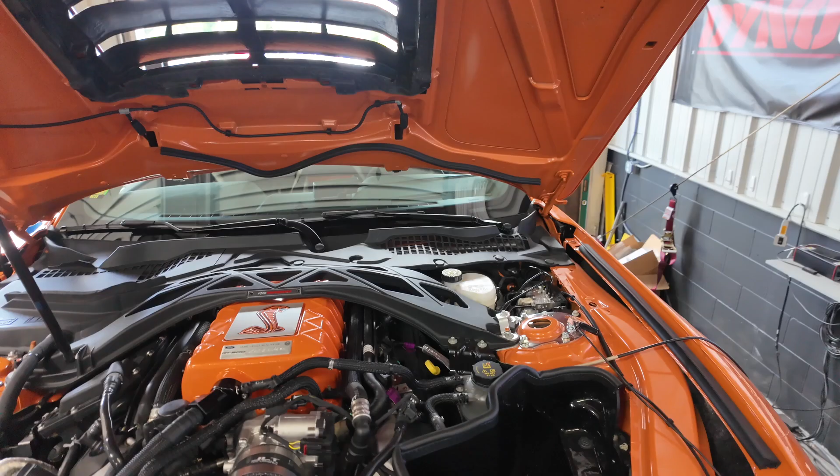We got another GT500 up on the dyno today, 2020. And this one is bright orange lid. So we'll kind of go over what we got going on under here. JLT cold air, VMP Predator lid with a Predator intercooler. It's got a 285 pulley on it, and it's got Kooks 2-inch headers with a Borla catback with the SwitchFire

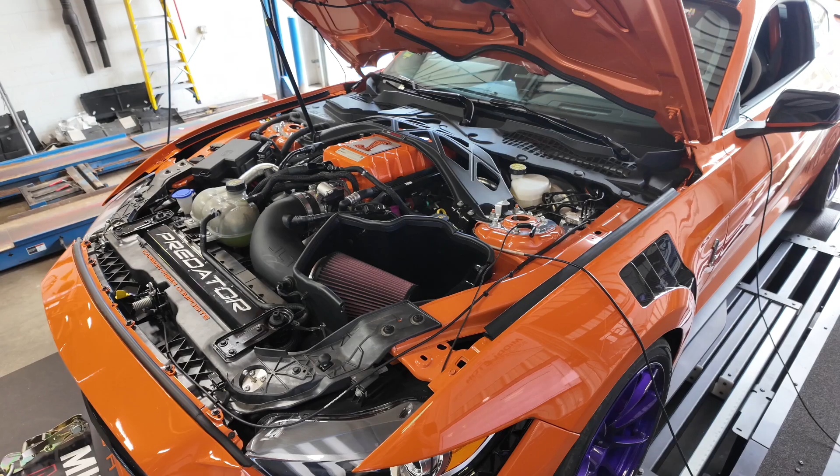crossover. So we got some pretty loud exhaust noises this thing makes. I think it sounds pretty awesome. I got pretty much the same setup on my car. I got a different brand header, but he's got a lot of dress-up stuff going on under here. He's got some other stuff going on, but yeah, pretty basic package.

This pretty much follows our 800 package. This owner did the work himself, but very similar to what we would call our MM800, with just those simple bolt-ons. So pump gas, 93 octane is what we're running on this. We're not doing any E85 or any fuel injector change or anything like that. Stock throttle body. The supercharger is not ported, so just the stock supercharger. So basically just external bolt-on stuff.

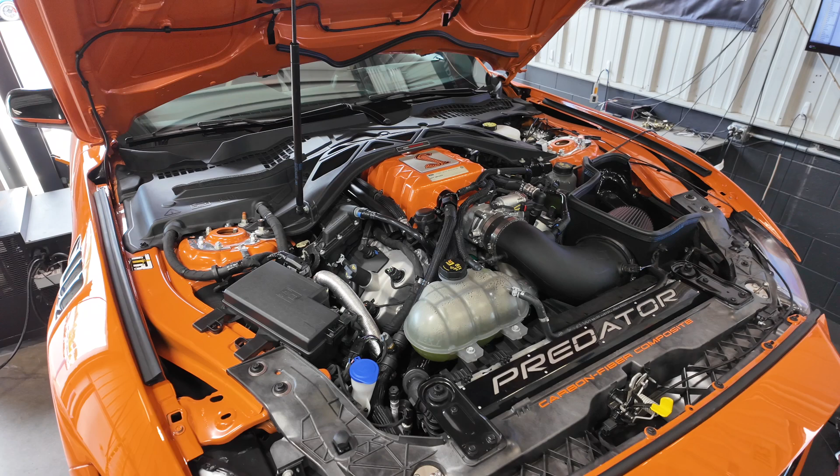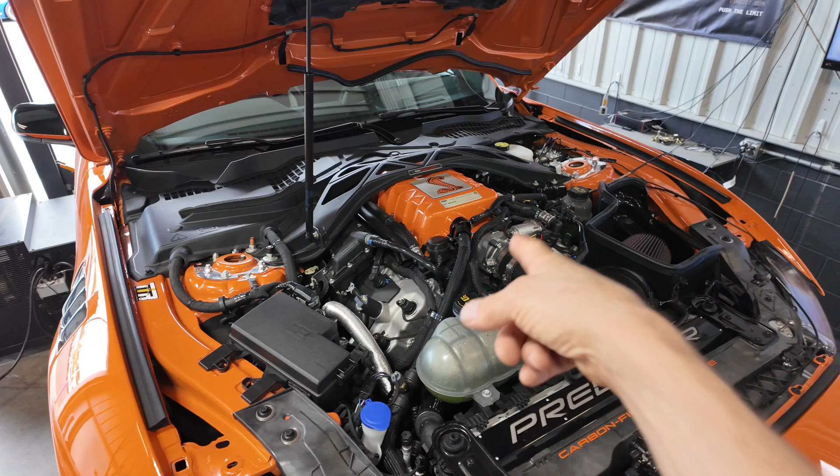And he does road race this car, so that's why we did suggest he go with the VMP cooler and the taller lid for the taller cooler, which definitely makes a big difference on road course. We don't see a whole lot of gains on the dyno out of these mods, and I've talked about that before in previous videos. But when you get on the road course, that lid and cooler runs 40 degrees cooler than the stock lid, especially once you start pulleying stuff.

Even with the stock pulley, we were seeing 170, even 175 degree intake temps. The manifold, the supercharger temp, which is read on the back of the lid. With this lid and cooler, 130, 135 on a hot day. So we definitely see a big drop. And again, a car like this with a pulley on it, you're going to see even more of a gain from where you would be to where you are with this lid and cooler.

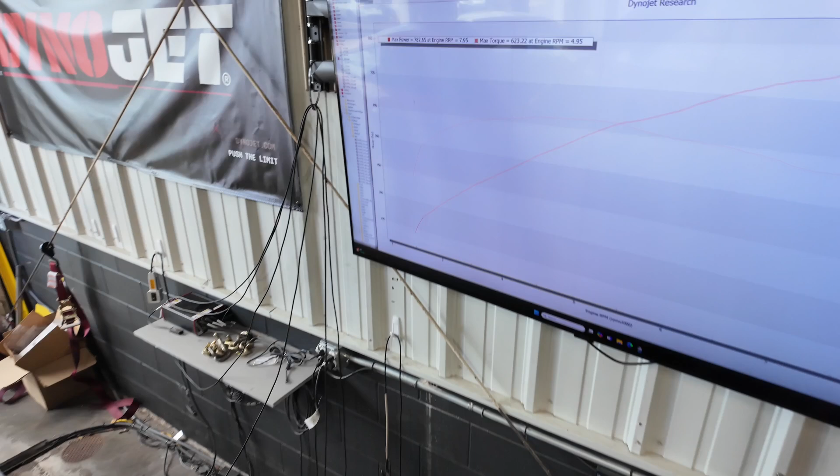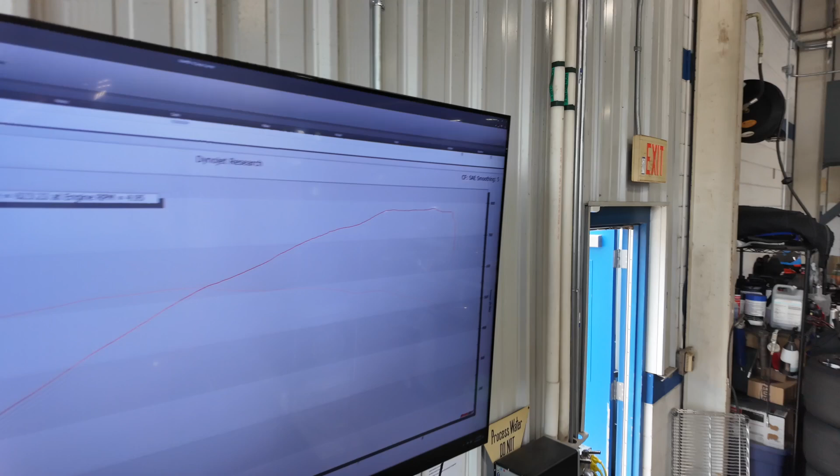So far, this is where we're at. Upper 700s. This car does have Toyo 888s on it, and those 888Rs get really gummy, just like a slick or a drag radial on the dyno. So they rob a little power versus the stock Cup 2s or a Michelin Super Sport or something that would come stock on a GT500. So we're down a little bit because of the tire.

Normally, this package would be real close to 800 at the wheels. The last two I did, one was 800, one was 815. But I was running those on the stock GT500 carbon Cup 2 tires, which just dyno higher. They're less sticky, less drag on the roller. So I'm pretty happy with where we're at so far. I'm going to do one more pull just to back this up. I got the tune dialed in. So I'll get that on video, and we'll take a look at the data log quick, and we'll wrap this one up.

Alrighty, so final pull on this one. Let's take a look at the final numbers here. So 785 was that final pull. Now, I did see that pull this morning, and I'll kind of explain this too. That pull was on a warm engine. I just got the coolant temp and the oil temp up to temp, but the supercharger was still cold. So it'll read a little higher, obviously.

Once you do 2 or 3 pulls, it's warm out, the supercharger gets hot, and they make a little less power. So that's what it'll make on a cold blower. But I don't always show that stuff because it's not really real world. You don't pull these cars out of your driveway and immediately race them. When you're racing them, they're always gonna be warmed up, the hood's shut, the blower's hot. And so I always like showing the actual real world, everything hot type of number. Again, that 789 was literally right away this morning.

And I didn't show it right away because I kind of wanted to talk about this a little bit. And sometimes you can even have a more extreme case. If it's cooler out, like the shop was 50 degrees overnight, and you get in it, start the thing up, get it spinning up on the roller right away, get the oil and coolant up to temp, the bottom of the engine will be warm, but that blower will not have heat soaked and will not have taken any of the heat from the engine yet, and you'll still have a cold blower lid, and sometimes that'll make an even bigger difference.

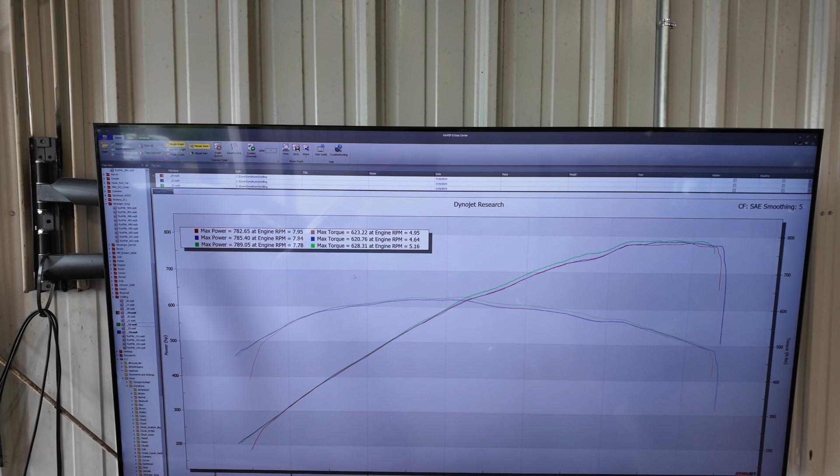So supercharged cars, especially pump gas stuff like this, are very sensitive to heat, and you can have numbers swing even more than this, even on a cooler day. Again, if the blower was 50 degrees, or if it was sitting outside on a cool day or a cool night, and you pulled it in, strapped it down, and ran it up, and the blower lid was 50, 60 degrees, it might make almost 800 at the wheels.

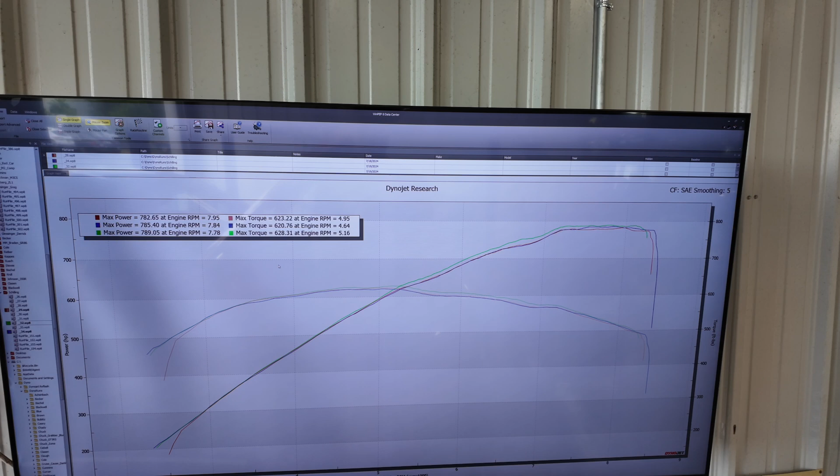So just to show you guys that, I like to share those little tidbits and details of information that you don't always see on the internet, and in all the videos you see out there of stuff getting dynoed.

So, yeah, again, let me pull this up. Hopefully we don't get too much glare here. So you can see the timing is sawing a little bit, and that's just the HFX system working.

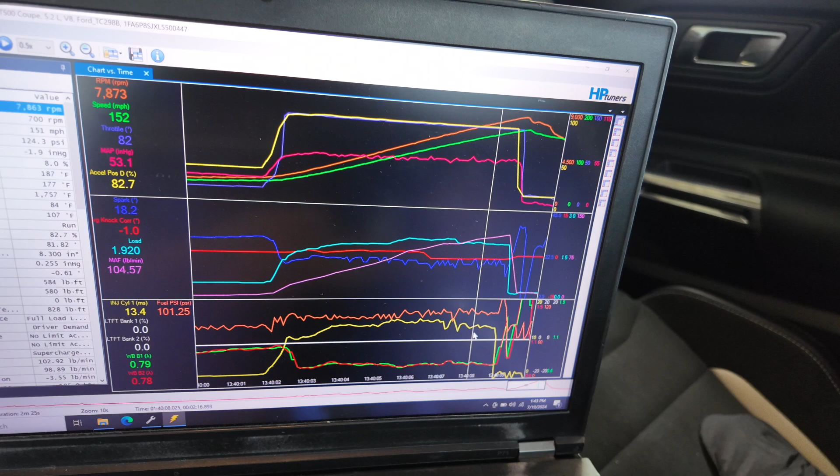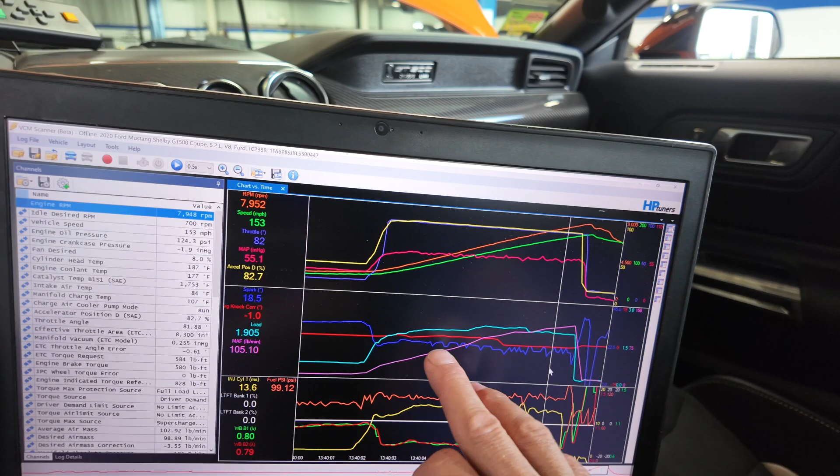He does put unleaded race fuel, like 100 octane, in this when he tracks it. So I did basically tune around that, because I know he's going to be doing that. So this is pulling about a degree on the top end, but if he does put race gas in it, the HFX system will put some timing into it, and it will learn up to about 21 degrees, which is probably going to be another 10 or 15 horsepower. But I wanted to dyno it how he brought it to us with the 93 octane in it, just to see what it makes on that.

So he does some stuff where they do autocross, road course, a dyno competition, car show type of thing. He does events like that with multiple different tests of the car, and then they add the points up, and that's what he wants to do with this car, and he's done it in the past. So that's kind of what we're setting it up for.

So because he did tell me that he wants to put some higher octane fuel in it, he mixes it in with pump gas, he's going to get a couple of points of octane, and it will bring this timing up a little bit at the top. And he will make another 10 or 15 at the wheels, so he'll be close to that 800 mark.

So everything else, air fuel: when we're on pump gas in these cars, I like to run the Lambda about 0.79. It's rich, not too rich where we're losing power, but rich enough to have the maximum amount of timing. Boost on this, we're seeing just about 14 pounds of boost. Again, stock supercharger, stock throttle body.

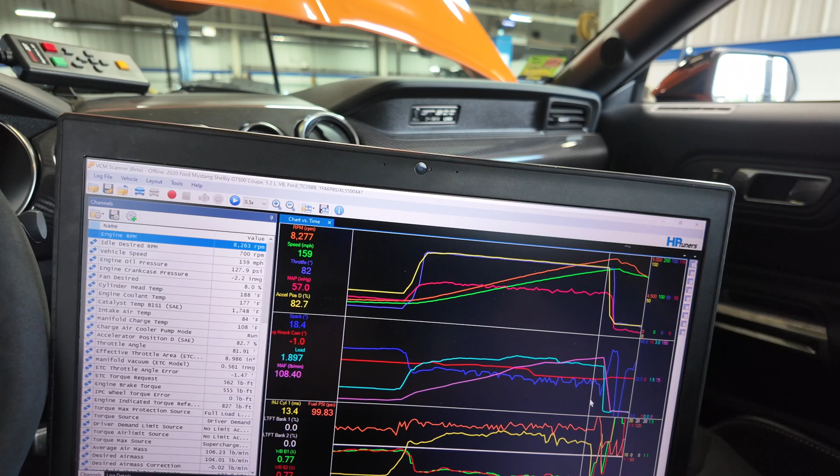So I'll kind of show you guys that. We'll go back and look at the dyno graph. When you pulley these non-ported blower, stock throttle body combinations, the power will kind of lay flat. You'll get a little bit of a boost increase up here, but the power will just lay over, because you kind of hit the limit of what the stock throttle body and the inlet of the blower is really going to do.

The main part of that's the stock supercharger inlet. It's got this big V-shaped air vane in there, and that's to help promote low speed torque and help the blower grab air at lower supercharger speeds and lower engine speeds, but it kind of hurts it up in the top end. So when you put a pulley on them, you really start to see that.

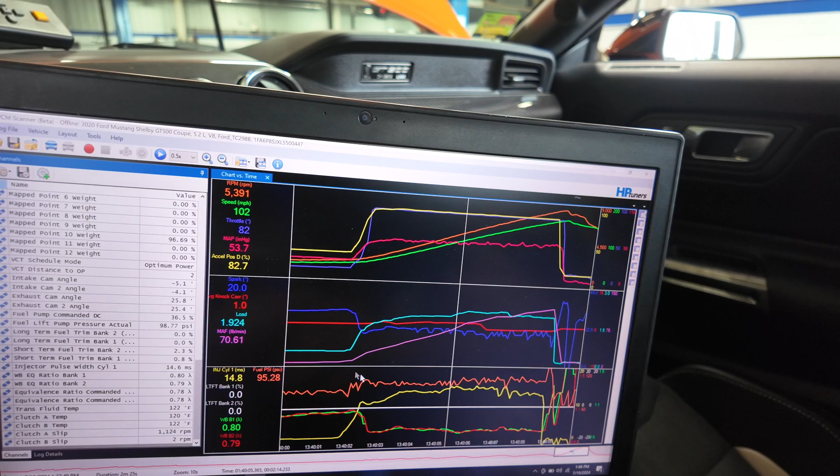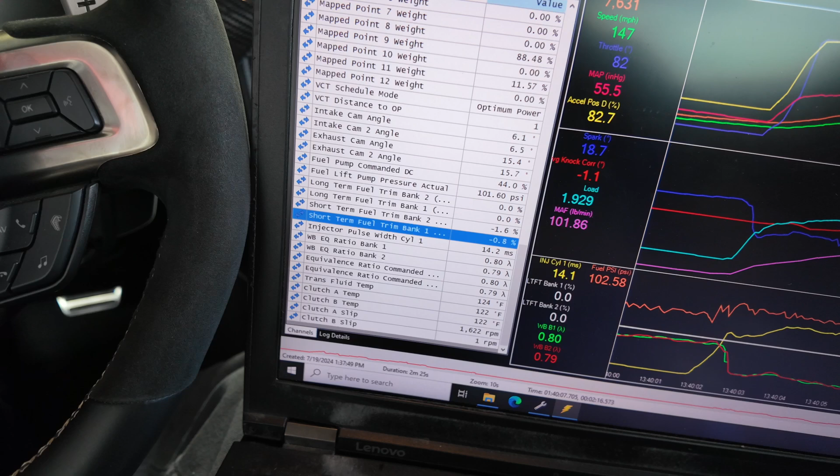But yeah, everything else, the fuel trims on this are, again, closed loop all the time, so it's taking feedback from the sensors. So my closed loop learning, I can highlight it right here. You can see I'm pretty close. It's pulling a little bit there, 2% negative. So I'm right there. Fueling is right on, spark's where I want it, and this is looking really good. Logging fuel pressure and injector pulse width, all that stuff, everything is really good on this. So this guy's going to be all set to race.

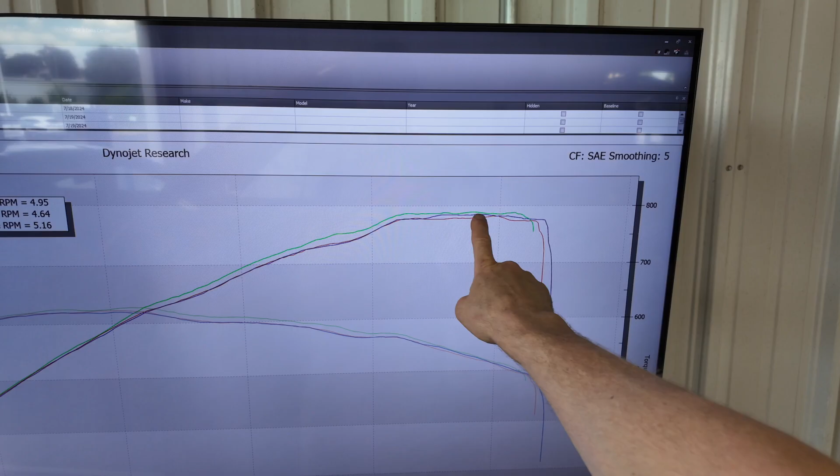But yeah, I'll just mention this quick before I end this one. You can see how this flattens out. You can really see it on that green line. Let me just close it so we're just looking at one, it's easier to look at. So again, that was the run this morning right away. You can see right here at like 7,200, it just flattens out. Look at it like a ported blower car, this is just going to keep climbing all the way to like 8,200.

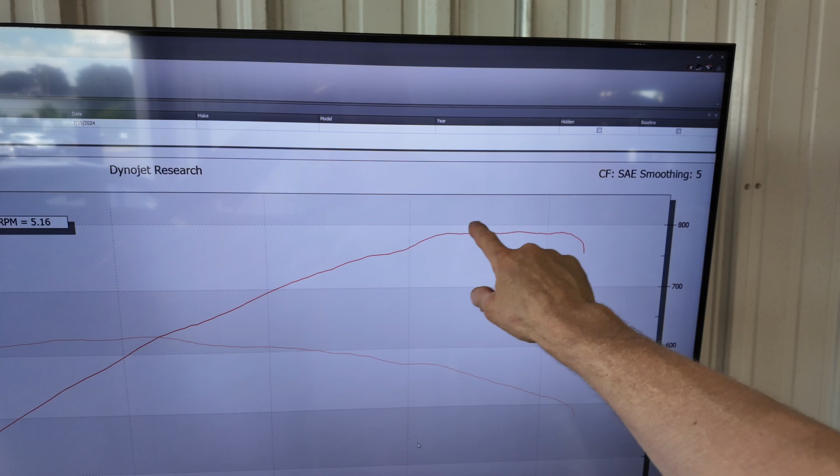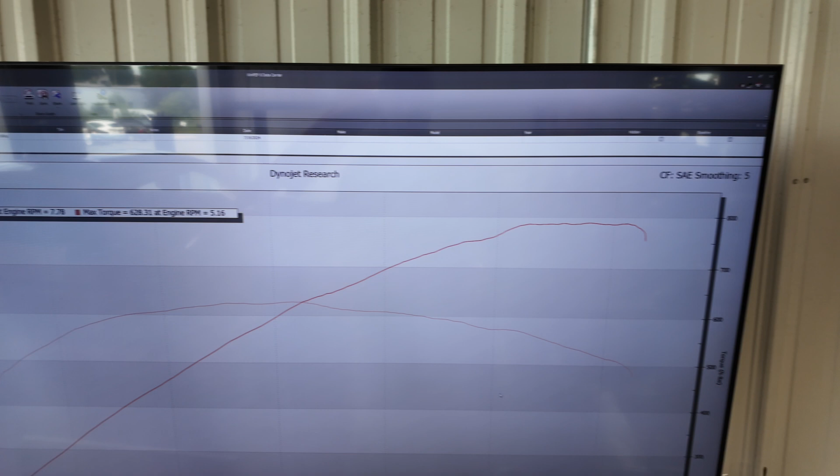And it's just because we're hitting an airflow limit of the blower itself, of the inlet of the blower. And that's where the blower porting really helps, once you get them above these RPMs, you really pick up a bunch. You do lose a little bit down low, but again, nothing wrong with this setup. Makes a really flat power curve. And we've had customers set some pretty fast lap times with this similar combination at some of the local tracks. So yeah, I'm happy with this.

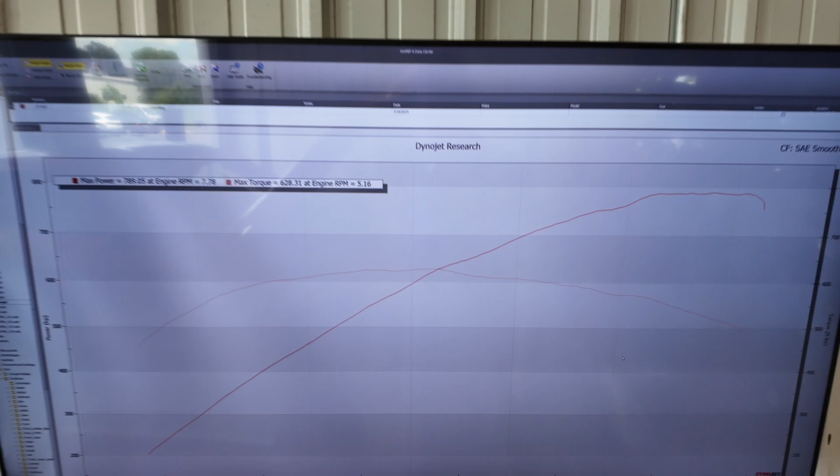He's going to feel a bit of a difference from where he was. He was making, I can go back and find that. Yeah, so that was his previous, where he had a cold air, the pulley, and no tune. So he just had the JLT, the 285 pulley, and stock tuning. So you can really see the difference in the tuning, and then what the headers did up here.

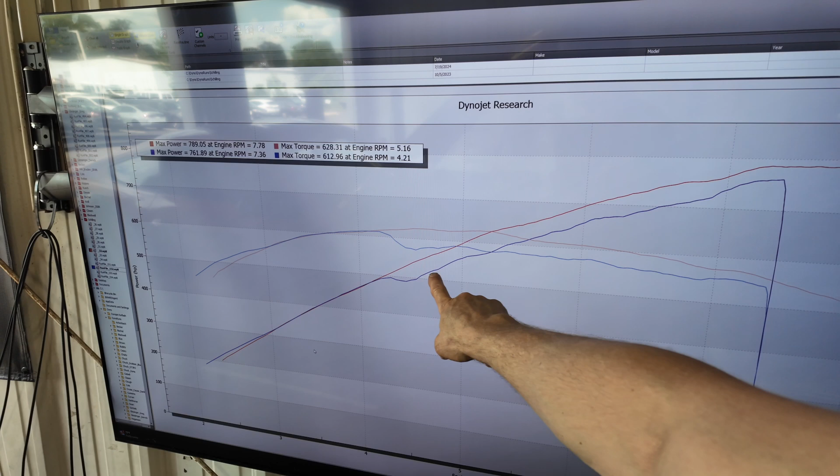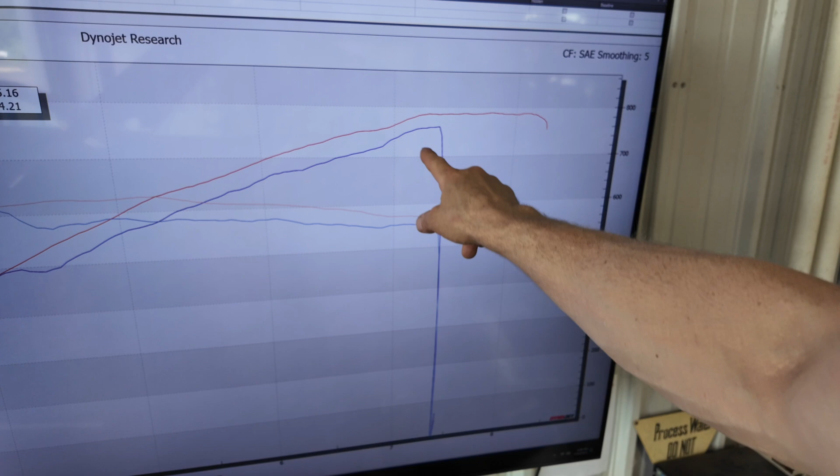So this drop is the factory cat protection that enriches the mixture, extremely rich, to try to help keep the catalytic converters cool. That gets turned off right about 6,800 RPM, so you can see it comes back up here, and there's no catalytic converter enrichment up here. So the air fuel ratios between these two are about the same, but you can see the headers, I can bring my cursor up if I can see it here.

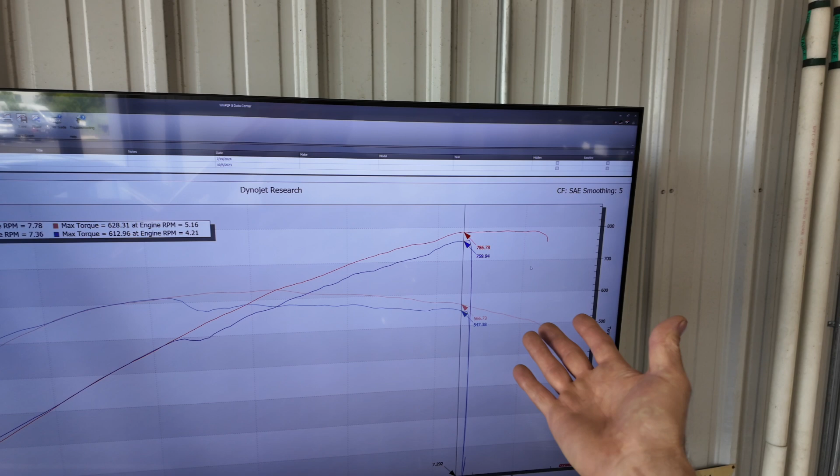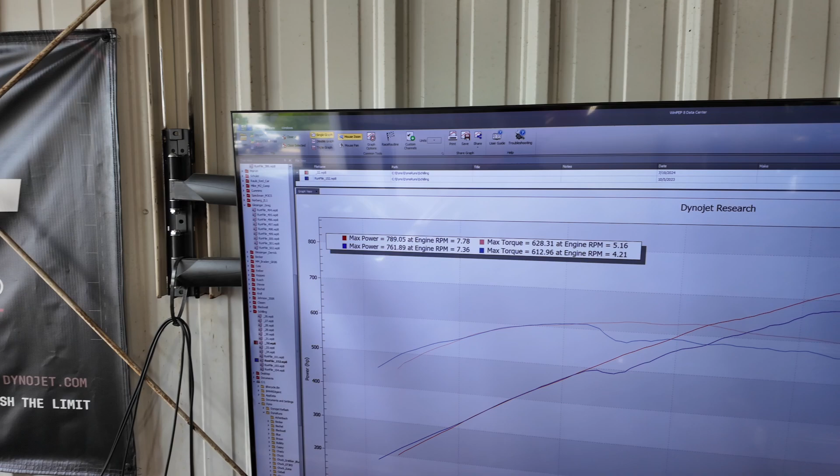Okay, so you can see that you pick up 20-some horsepower just with the increased flow of the headers. Almost 30 wheel right there, just in a random spot I picked. So that's going to be a pretty big difference. When I'm talking peak to peak, it doesn't look like a whole lot, just about 30 wheel, but we're talking over the rev range of not having this drop in power and then having to come back, and the ability to rev it higher.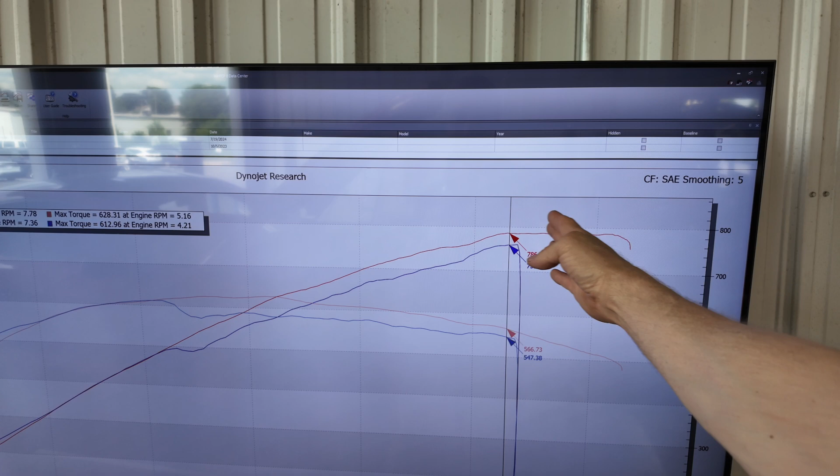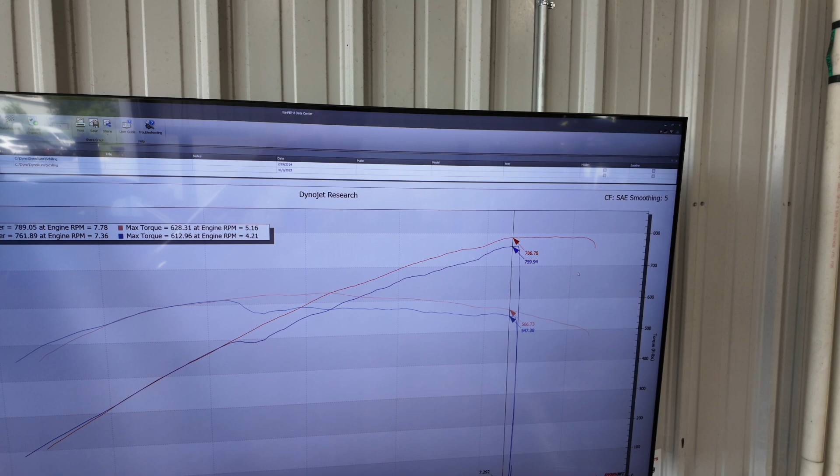I up the shift points on these things from where they're shifting at 7,400, we're shifting at 7,900. And so now your shift recovery's up higher. So the average power made throughout the rev range when you're racing at wide open throttle is quite a bit greater. So it'll be a big noticeable difference from where he was to where he is now on that red line. So that'll wrap it up for this one, guys.